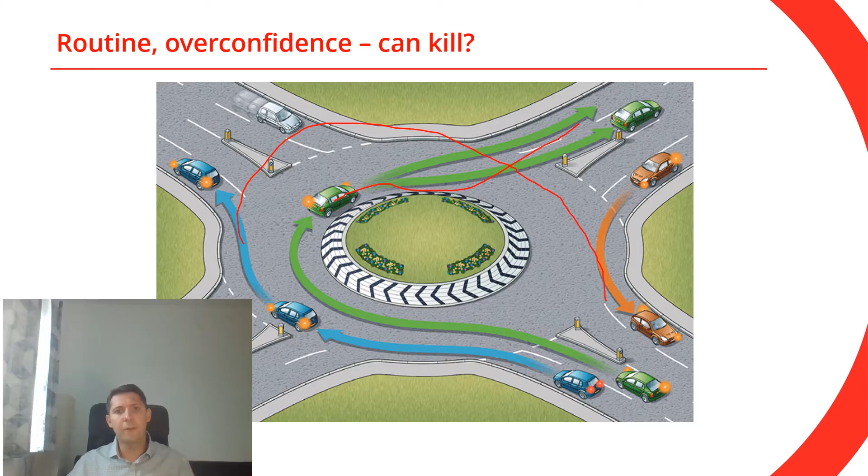A while ago, I visited my parents. As I was the green car, let me find a pointer. I wanted to turn right on the roundabout, so I chose an inner lane. As I wanted to leave the roundabout, I had to cross the outer lane. Unfortunately, the blue car you can see here, instead of going straight, the driver decided to make a U-turn. So basically he wanted to do that. Because I didn't look in my mirror, I turned and the blue car hit me, causing an accident. You can imagine how scared I was, as my wife and my daughter were sitting on this side of the car. Luckily this was at slow speed and nothing very serious happened.

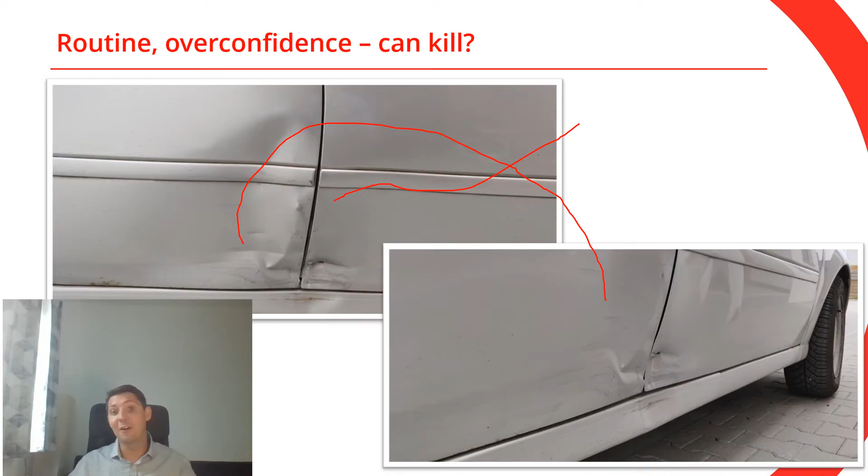The worst bit I didn't mention is that I borrowed that car from my father-in-law. That's right, you heard it, that was my father-in-law's car. I had to call him and explain what had happened. You can only imagine how embarrassed I was.

Why am I sharing this story with you? A few years ago, I was lucky enough to lead a repair project of a generator that had gone through a motoring incident. The project was very challenging, to the extent that I was asked to give a presentation at one of the industry-related conferences. I thought at the time this must be a very rare situation, and we should share this information with everybody simply to warn them. I couldn't have been more wrong, as since then our company has dealt with two more generators which went through this transient condition called motoring. So it happens more often than you think. This is why we continue sharing these slides with engineers from around the world, with hope that it will help you understand this very specific transient condition and its consequences.

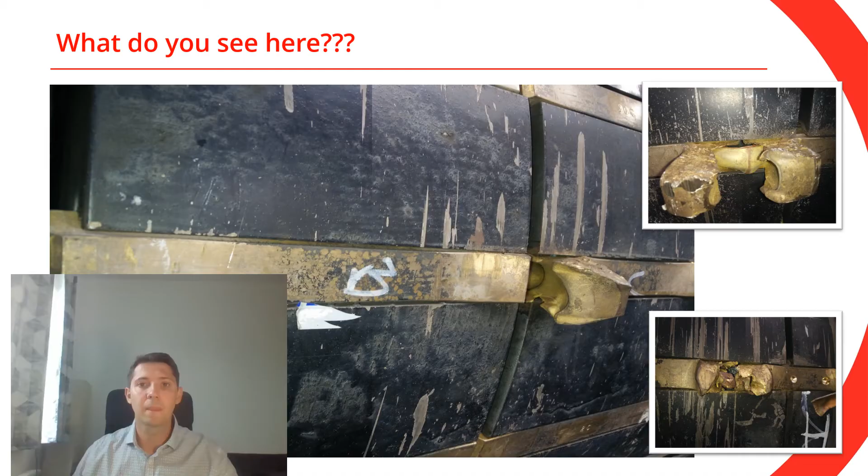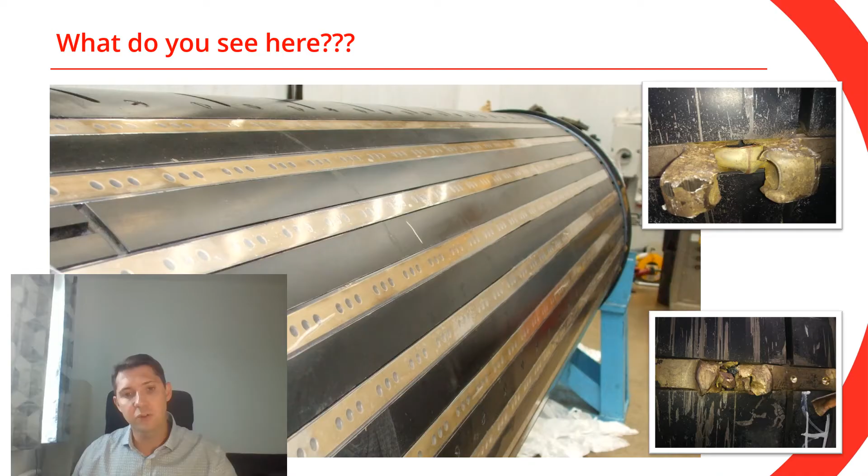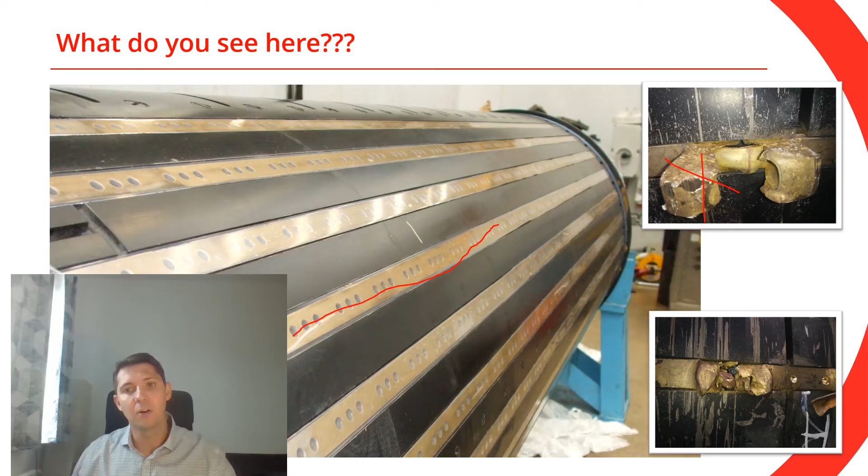For those who don't know what we see in these pictures, that's the rotor wedge. And you're right, it shouldn't look that way. This is what the rotor wedge should look like normally. This obviously isn't normal. So something has happened to cause that temperature rise and that wedge to be bent and protruding from the rotor body, as you can see in these two pictures. We're going to talk about it in this presentation.

So what is motoring? For those who don't know, we're going to go through a few slides and explain a little bit of theory, and I hope that by the end of it you will have a good feeling of what generator motoring is.

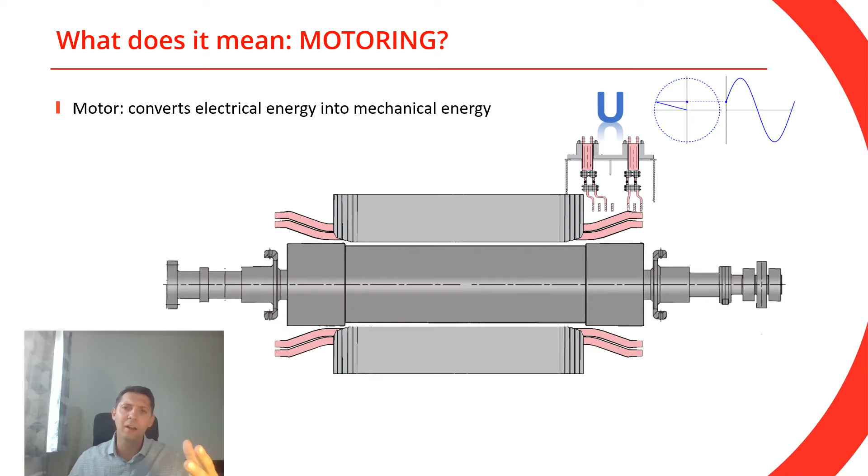Let's look at a different scenario. We know that the motor converts electrical energy into mechanical energy. So if you accidentally connect the generator to your national grid, the armature will produce an AC rotating flux, and that flux will induce very high currents flowing through the surface of the rotor, as you can see here. Then in time, the rotor will start turning, and this could potentially cause severe damage. Again, these are conditions we don't like, and we want to prevent this from happening.

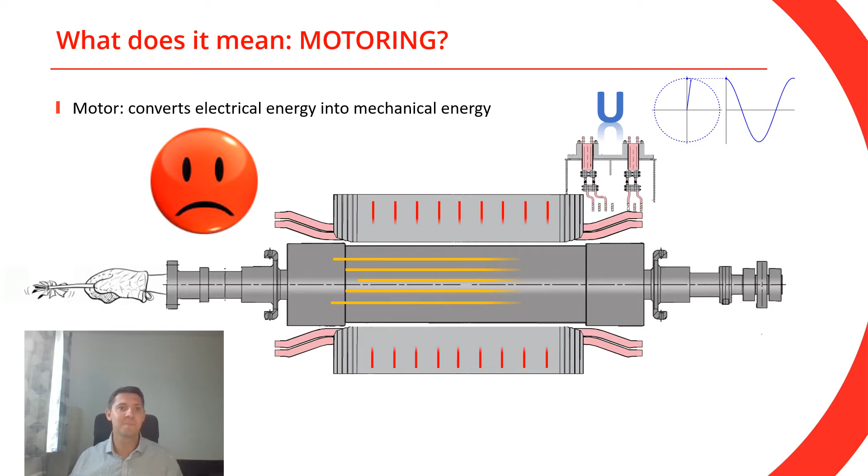So can a synchronous generator work as an induction motor? It's usually not as simple as you might think. There's a yes, but, and then on the other side, there's a big no. So let's talk about yes, but.

When the machine is at full speed, so say in Europe that will be 3000 RPM, in the US and some other parts of the world that would be 3600 RPM, and for some reason if the excitation of the rotor is gone, in that moment your generator will start working as a motor. But because you should have reverse power relays, the generator should trip and nothing serious should happen to your rotor. So again, nothing to be worried about.

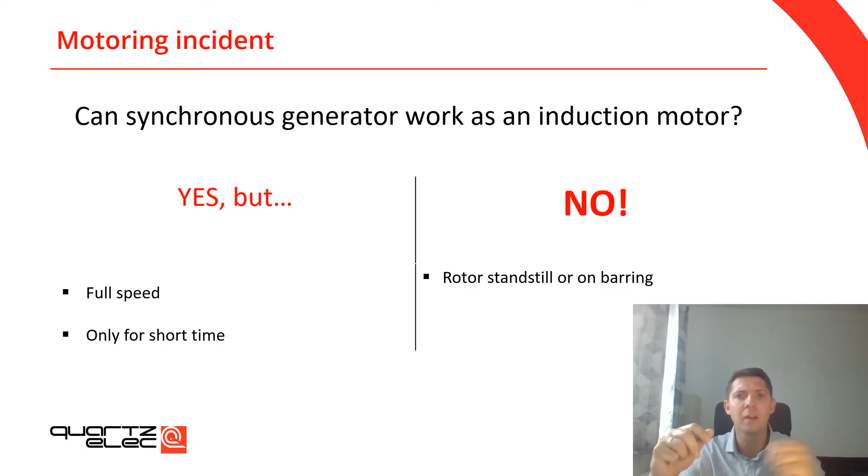We should really consider two different scenarios: one when the rotor is at speed and the other when the rotor is at standstill. Let's focus for a minute on the left-hand side.

When the machine is turning at full speed, you have centrifugal force acting on all the components. You have very good linkage between the retaining ring and the wedges. In this particular example, the wedge and the retaining ring are part of the damper circuit, and because of that, you have a low resistance joint between these two components. So if you have any currents flowing, they will easily go across to the retaining ring and act as a proper damper circuit.

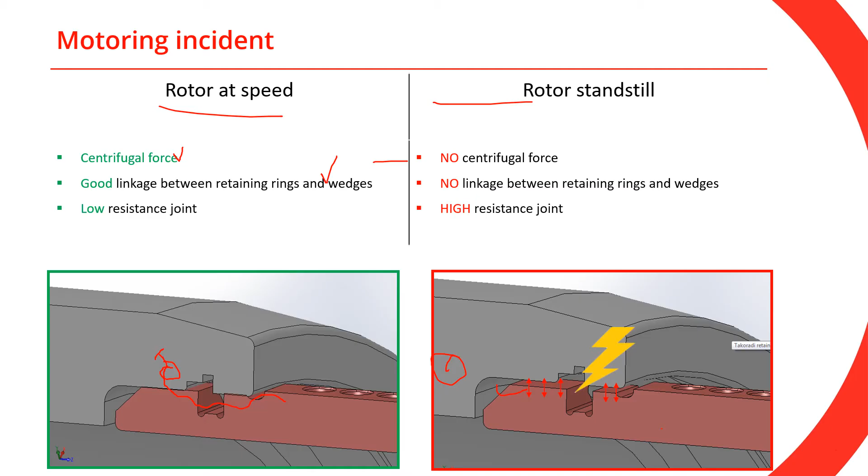Now let's jump to the right-hand side and consider the situation when the rotor is at standstill or at barring gear. In this case, there's no centrifugal force acting on these components, and there's no linkage between the retaining rings and the wedges. Obviously it's an exaggeration here, but there's got to be a tiny gap between these two components. Because of that, when you have a high resistance joint, any currents flowing will create that little arc, and that obviously will cause serious damage that I'll show you in a minute.

Let's try to answer these questions: what happens to the generator, because we know it starts operating as an induction motor? I really like this slide because on the left-hand side you have a 3D model of the fully built generator rotor. In the middle, we removed pieces of the damper cage, and here you have long aluminum wedges, shorted by two retaining rings.

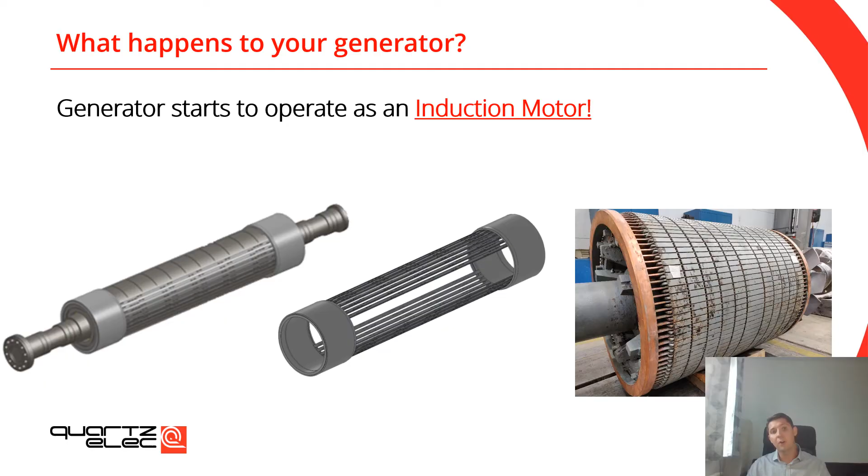Now, can you see the resemblance between the middle picture and the picture on the right-hand side? Yes, it looks very similar, because on the right-hand side you have a cage induction motor. So this is how similar these two designs are, and as I said, the generator starts operating as an induction motor.

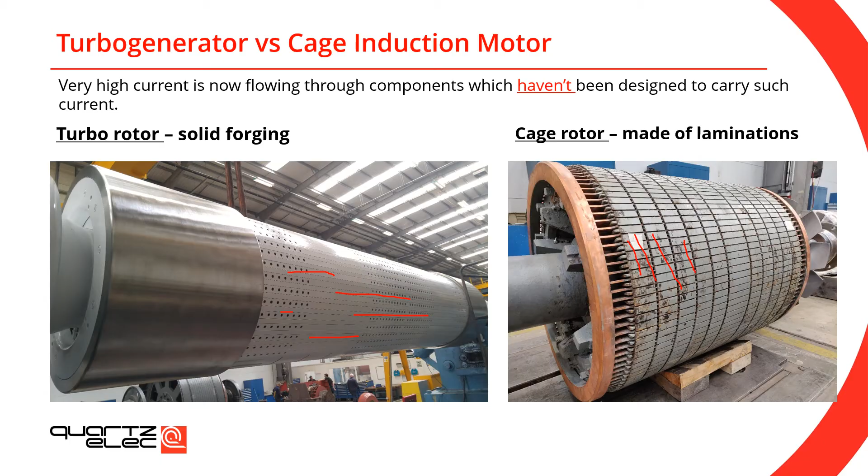So we know you will have very high currents flowing through components which haven't been designed to carry such current. Now think about it, look at the right-hand side here, a picture of the induction motor. The induction motor body is made of hundreds of laminations, so if you have any currents induced, you basically won't have currents induced in the rotor body, unlike the turbo generator rotor, because the turbo generator rotor is made of solid forging. So obviously, if you have any currents induced in the rotor body, they will easily flow, causing potential damage.

Let's add one more thing to that equation. You might remember from school that the starting current of an induction motor is as high as 5 to 7 times the normal full load current. That means you have very high currents flowing through components that haven't been designed to carry such currents, potentially causing severe damage.

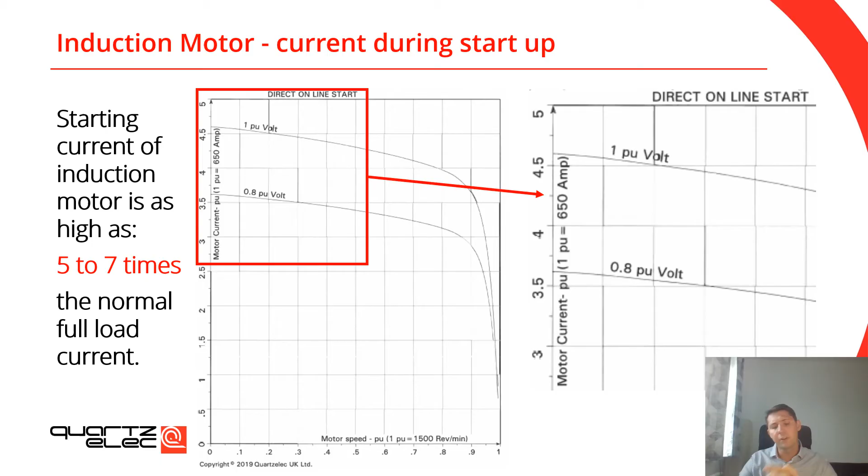This is my favorite bit, because what happens to the rotor? You're about to see some very good pictures from 3 generator rotors that went through the transient condition called motoring.

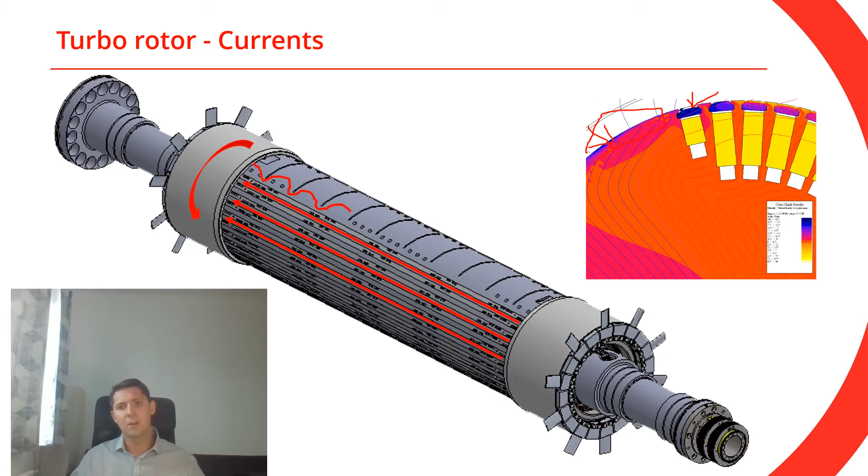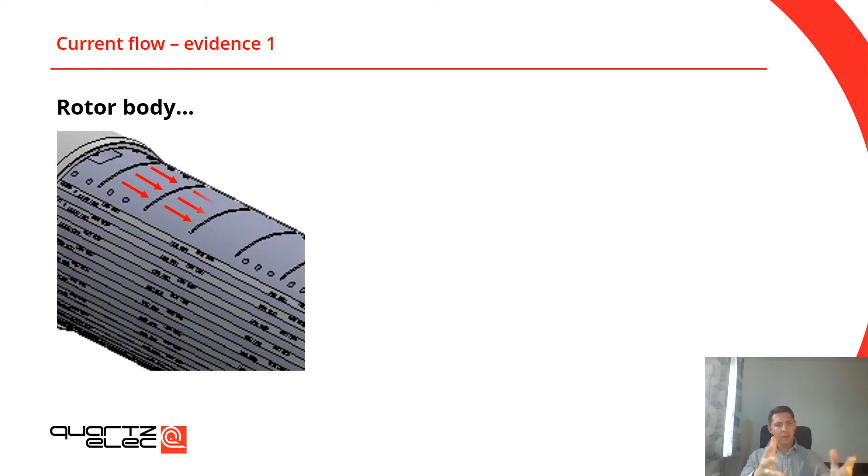Now you'll see the real stuff, the real evidence of that temperature and high currents flowing through these components. We said the currents will be flowing through the rotor body, as shown here. So this is evidence number one. I can prove to you that this is the case.

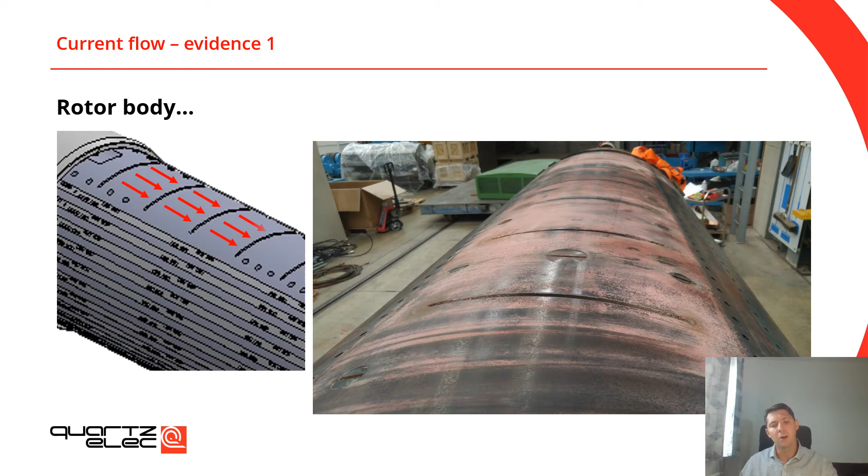This is the generator rotor, the first example, and you can see the discoloration of the rotor surface. Normally this surface should be shiny and beautiful, and it isn't. So this is how hot it gets when you have very high currents flowing through that surface of the main rotor pole. For those who don't know what the normal rotor pole should look like, well, it should be like this, nice and shiny, as you can see on this picture.

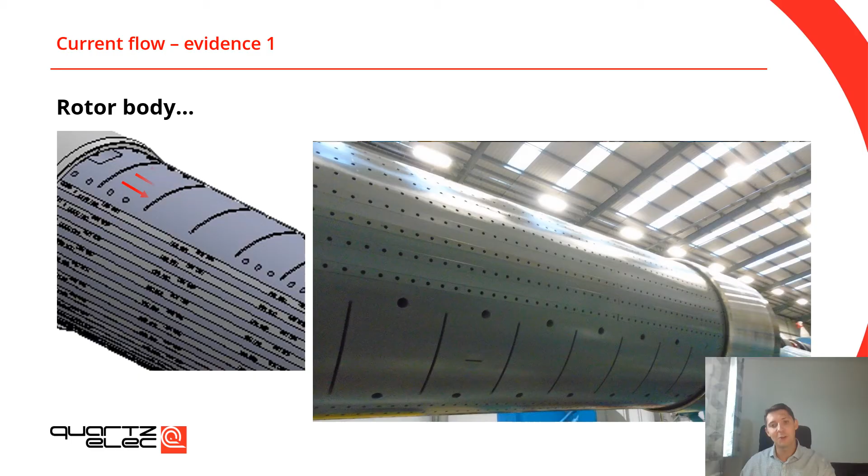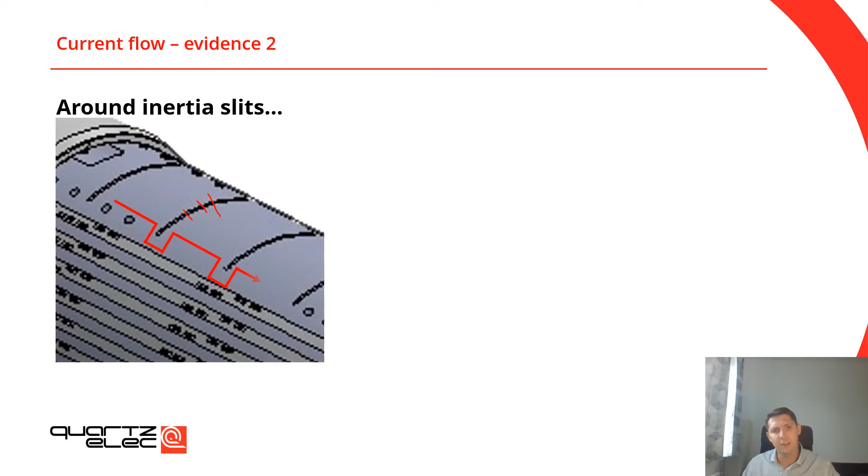You're about to see two of my favorite photographs of the generator rotor. We know the current is generally lazy, so instead of jumping across the air gap when you have that inertia slit, it will rather go around, as you can see on the left-hand side.

Now have a look at this. It's amazing because you can clearly see the path of the current. Instead of jumping across, it will go around the inertia slit. You can see here, and then on the bottom picture, the same location. This is the location of the highest current density, where it's very hot, and you need to pay attention to this location when you refurbish the generator rotor like this.

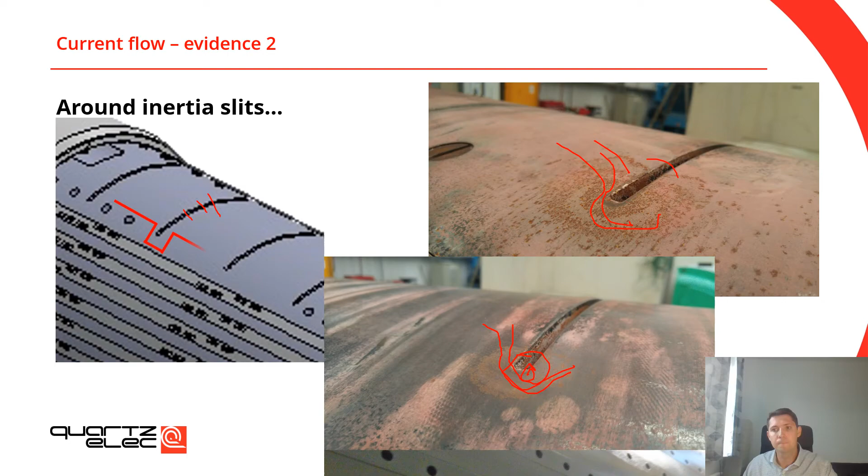For those who don't remember what the rotor should be like in normal condition, it should be nice and shiny, as you can see here on this picture. It wasn't clearly like this on the previous picture. I just love it so much. I hope you enjoyed these two pictures.

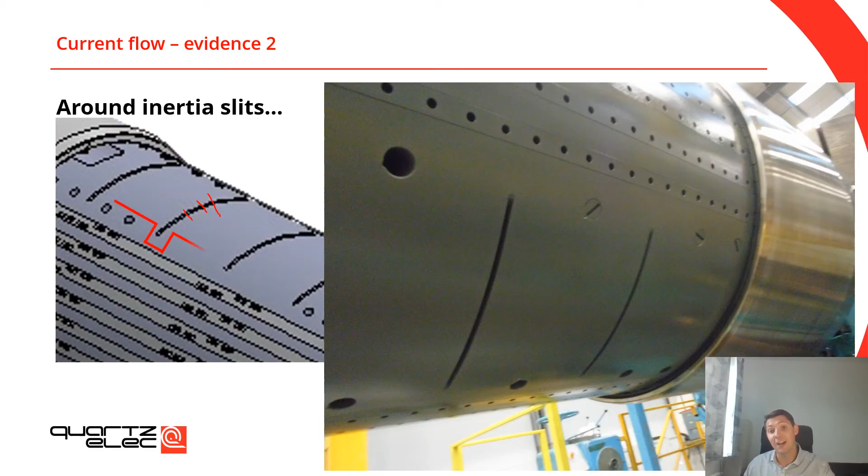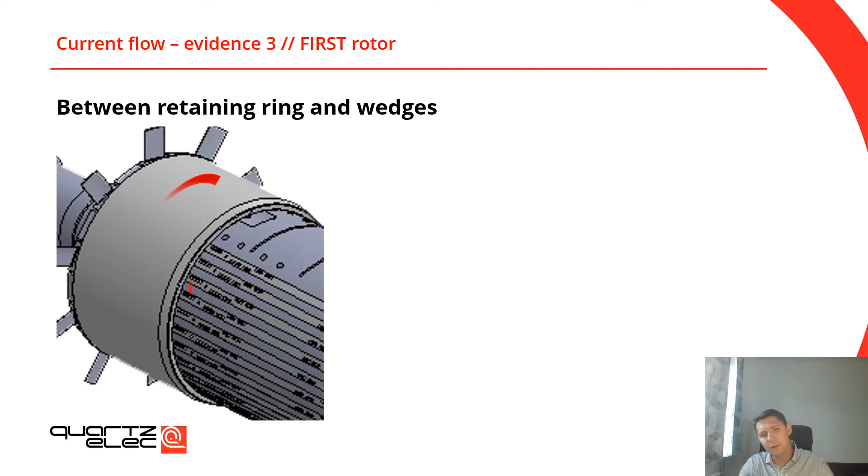We said that the currents will be flowing between the rotor wedges and the retaining ring, and it's true, it's actually true. I'm going to show you the evidence. Look at this. On the bottom picture, you can see the tips of the rotor wedges, and you can see arcing damage everywhere on every single rotor wedge. Then on the top picture, you can see the arcing damage corresponding with these wedges.

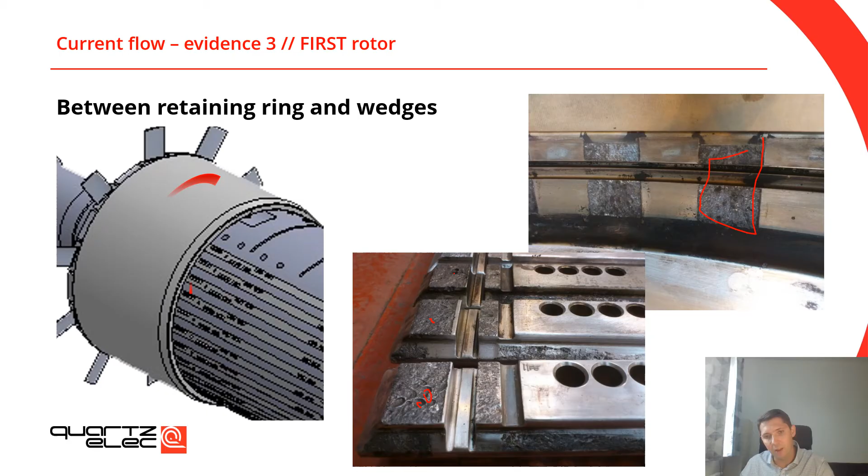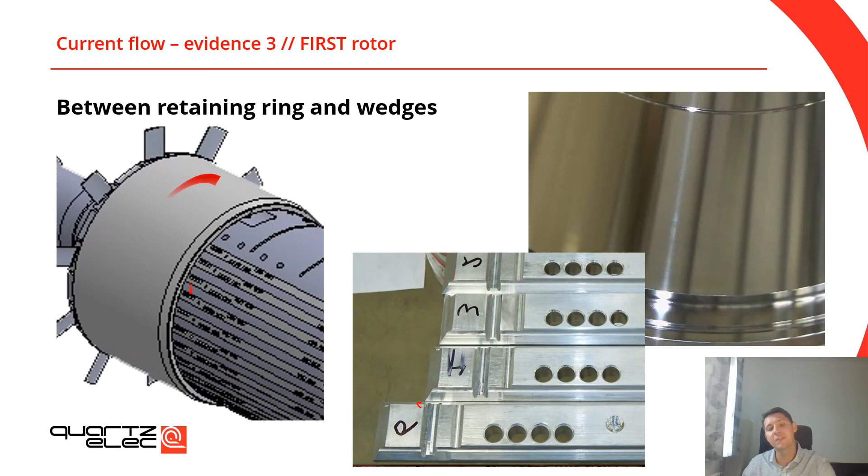Obviously, the retaining rings in these conditions have to be scrapped as well as these wedges. For those who don't know how a retaining ring or brand new wedges should look like, have a look at this. Again, it should be shiny and nice, not as what we've seen in the previous pictures.

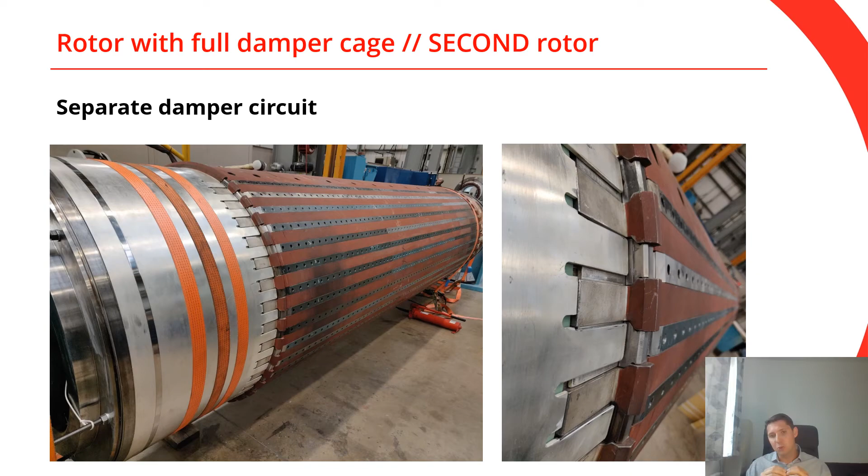You might be of the opinion that if the rotor has got a separate damper cage, as you can see here on these two pictures, the damage shouldn't be as severe as on machines that don't have a damper cage. Well, I don't believe that to be true, and I'm going to show you the evidence.

So this is the same rotor, and you can see this location here. This is part of the damper cage and that bit that sits in the end winding. It's basically welded, this piece welded itself into the tip of the rotor wedge.

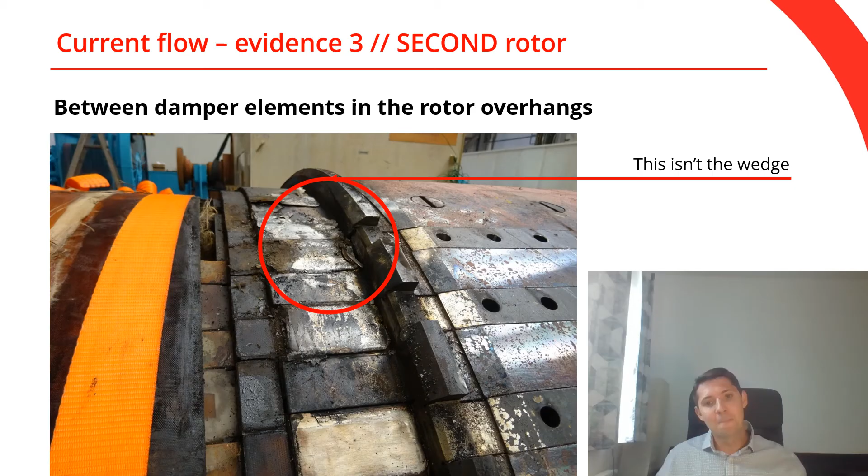Now look at this. It's interesting because these teeth here on coil 1 here, and coil 1 here, you can see that it's just evaporated. Can you see it here? It's just disappeared. This is how hot it gets. What I can tell from that evidence is that you might actually have a separate damper cage, as on this particular design, but it won't save your machine. This is the consequence that you might find.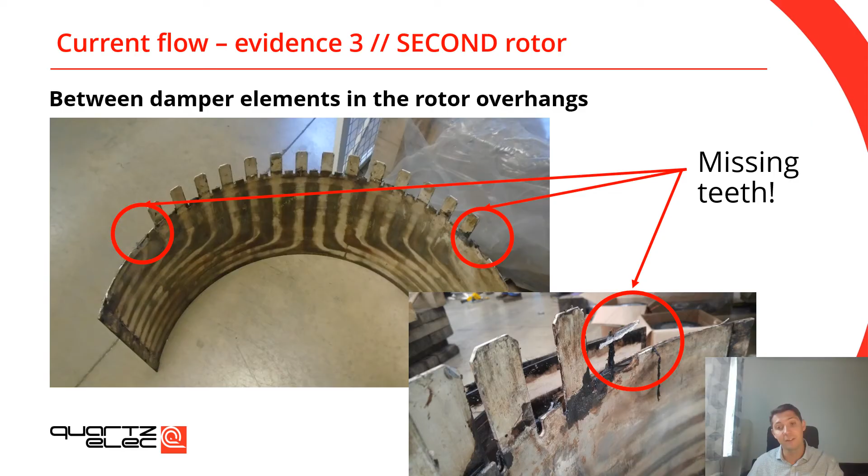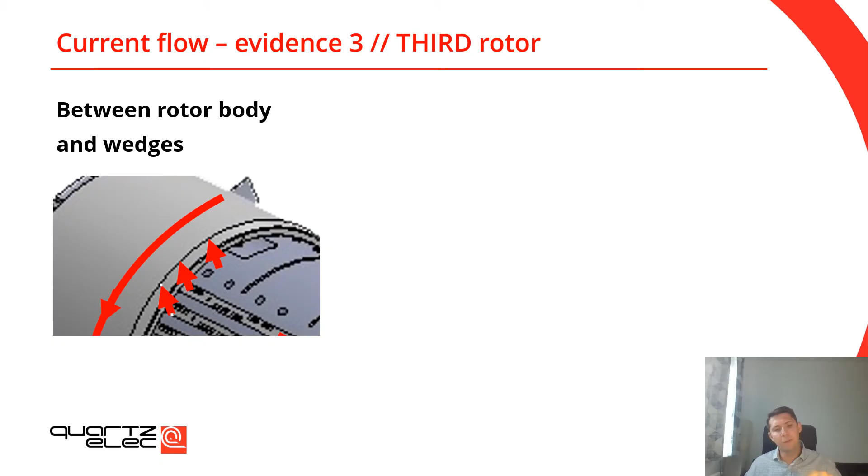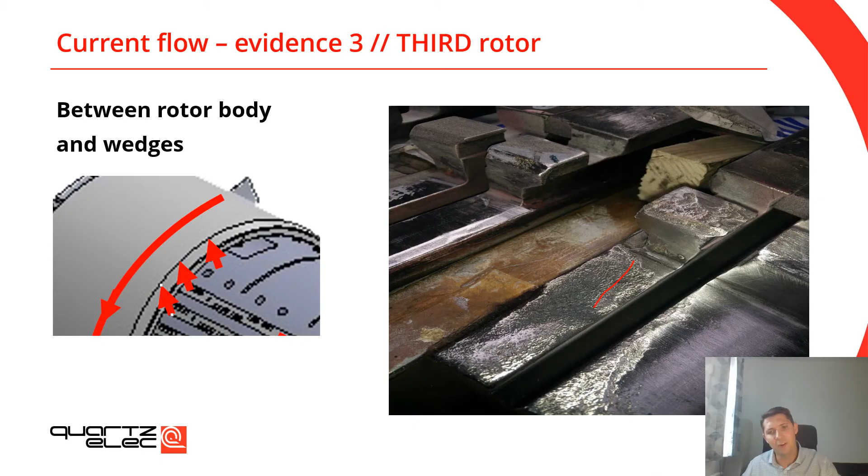We already said that the current will be flowing between the wedges and the retaining rings, but also that the current will be flowing between the rotor body and the wedges. So this is just another piece of evidence. You can clearly see severe arcing damage on the teeth. This is the location where you would normally shrink the retaining ring when you assemble one. So severe damage also here and there.

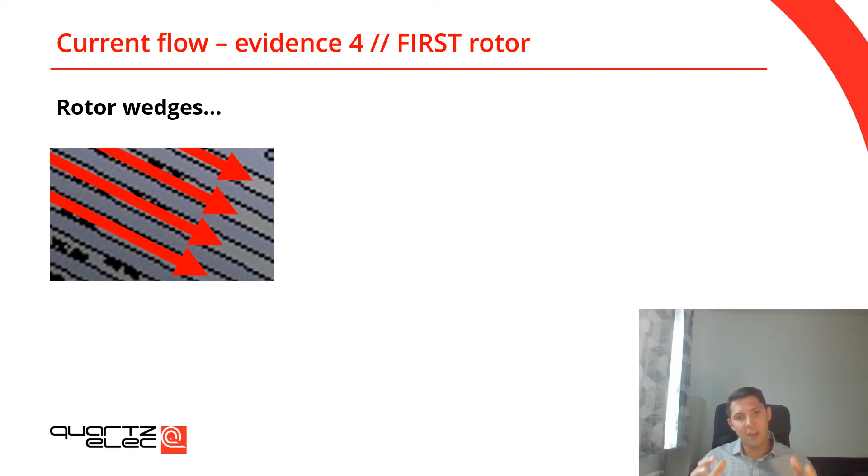So what happened to the wedges? We did say that the current will be flowing through the wedges, but you need to ask yourself, have these wedges been designed to carry such current? Well, not really, not really.

So this is the location of one of two double earth faults. The size of that hole, and by the way, it's not a ventilation hole, it shouldn't be there. The size of that hole is the size of my wrist. It's really, really big, and you can see that the aluminum alloy just disappeared, just evaporated.

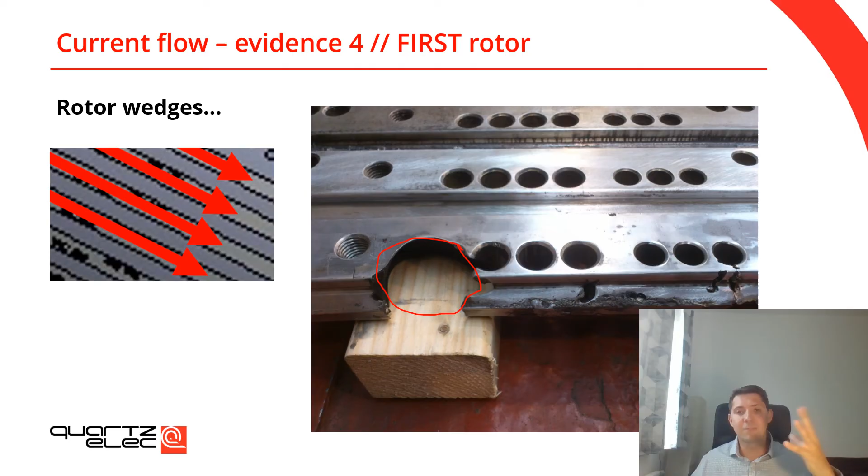We have another very good example of damage caused to the rotor wedges. In this design, instead of having one long wedge going through the whole rotor body, you have shorter wedges. Because of that discontinuity of the wedge, you can see that the current, since it's lazy, instead of jumping across that gap, chose to go through the rotor body and then back to that wedge. Can you see it here? So again, pay attention to that location, because this is where it got very, very hot.

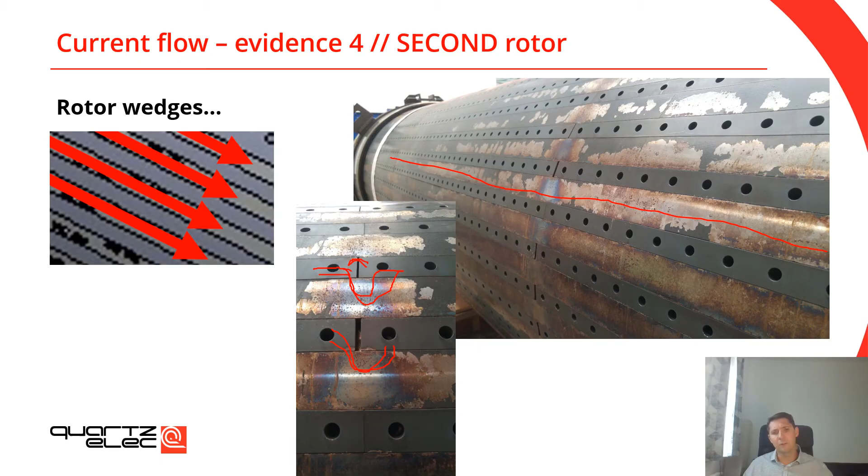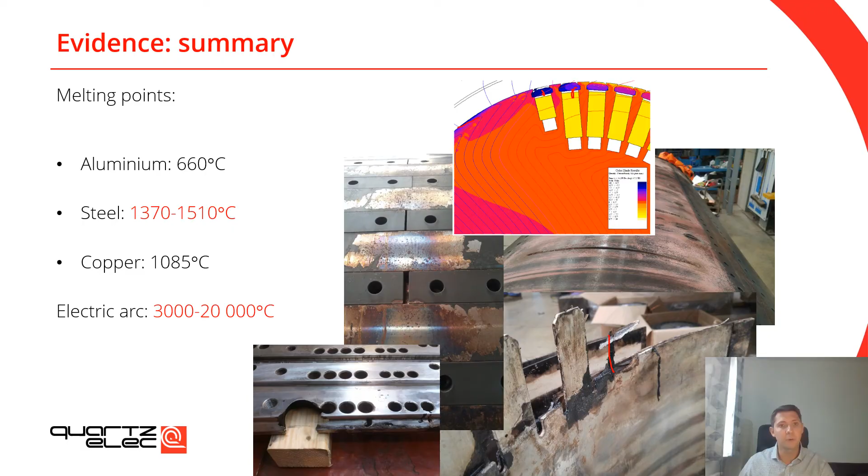This picture shows the temperature distribution and skin effects when the rotor and generator go through the transient conditions called motoring. What else can happen? Because it's not only the rotor that will be damaged when the generator goes through these transient conditions. So over the next few slides, I will show a few more pictures with the damages, not only of the components we've already seen.

And remember, this is the longest lead time item, and this is also the most expensive item. So you need to be really, really careful with that.

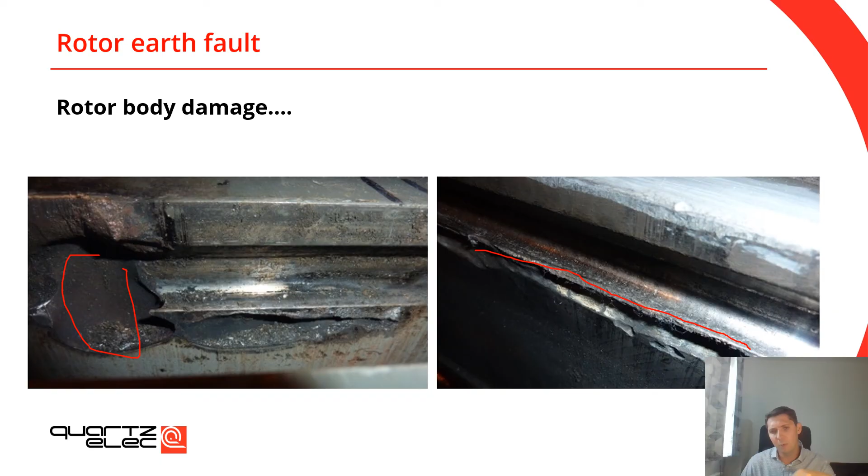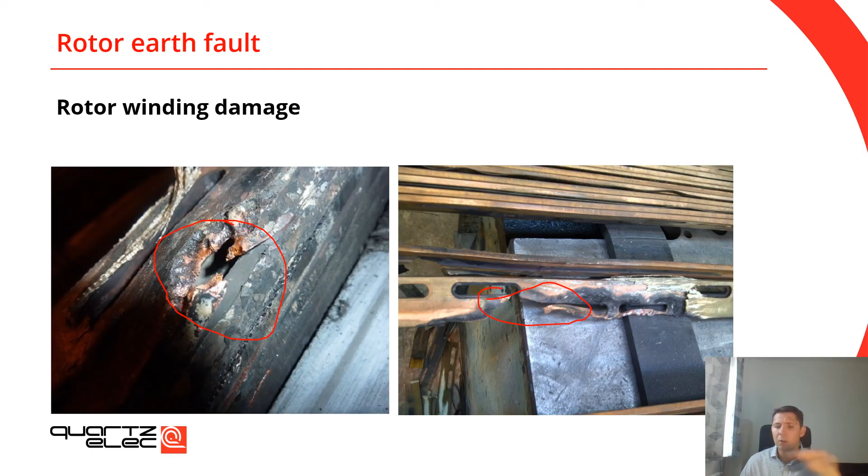So one of the other consequences could be the damage to the rotor winding, not only the surface. Do you remember one of the first slides when we showed that wedge that protrudes from the rotor surface, from the rotor body? That wedge, in this particular case, was rubbing the surface of the stator core, causing that severe damage.

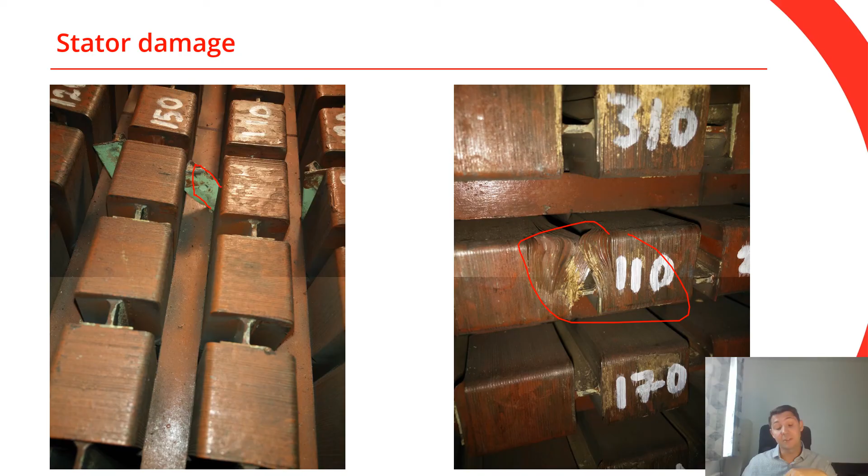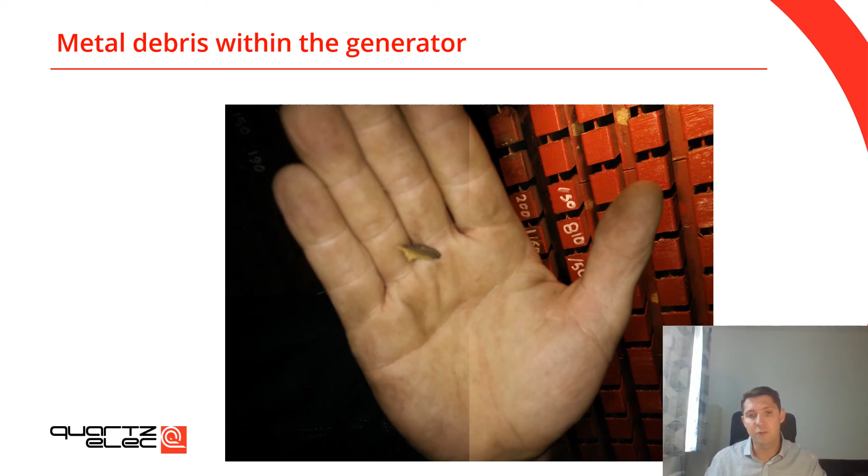Actually, there were more wedges rubbing the core. So we found a lot of debris in almost every ventilation duct on the back of the core, pretty much everywhere within the generator, and that will cause extra challenges when you try to refurbish such a unit.

We already said that if the machine was at full speed, the reverse power relays should stop the unit, and we shouldn't have any damage to the generator. We also said that when the generator was at standstill, the situation is very different, because then within seconds you will cause severe damage. Now let me read that sentence to you.

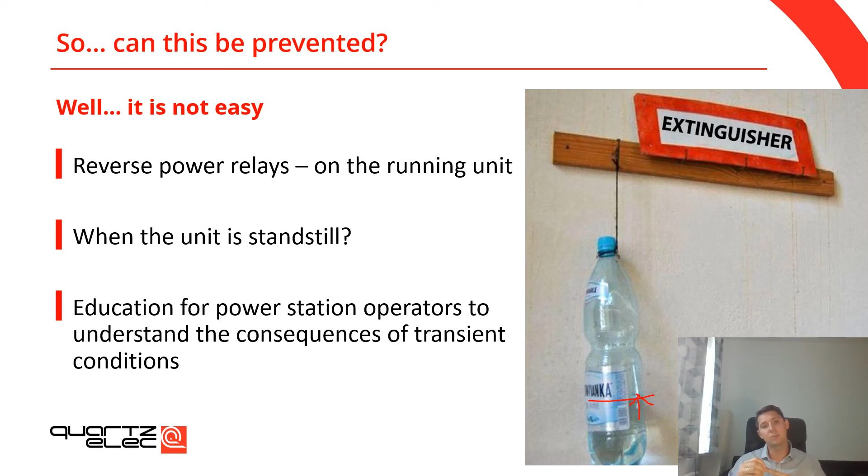Education for power station operators to understand the consequences of transient conditions. Why did I put this sentence on a slide? Basically, when you take the three examples we just went through, the power station operators, although they knew that the generator they were running went through the motoring incident, they tried to run the machine up again and again, potentially causing even more damage than if they didn't run it. So basically, they didn't understand the potential damage that a few seconds of connection of the generator with the grid could cause to the generator rotor.

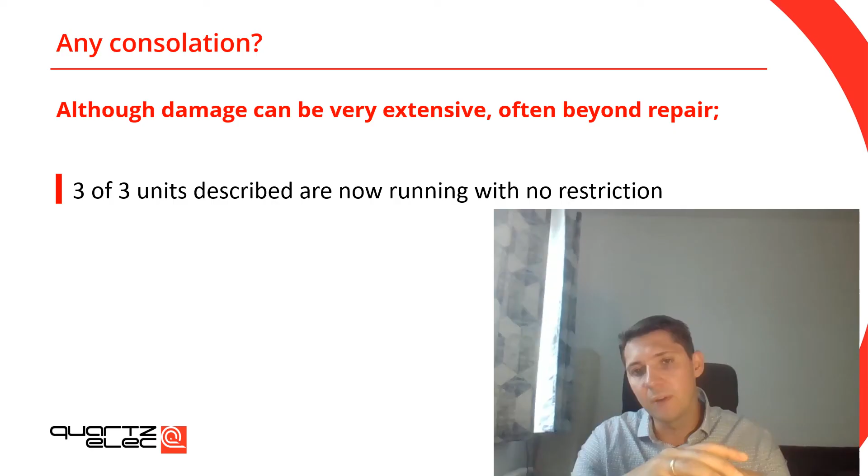There's also one good news. So although the damage can be very extensive, often beyond repair — and I think you would agree with that because we've seen quite severe damage — as far as I know, all 3 of the 3 units we described are now running with no restrictions. So the units we went through and we've seen today are now in operational condition without any technical and commercial restrictions to run.